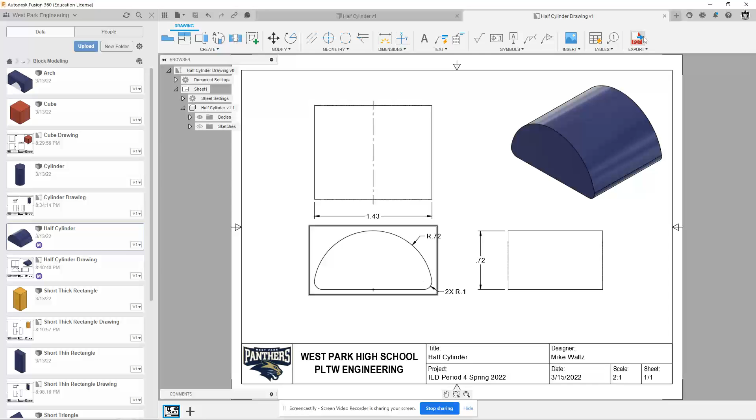All right, you guys, we're going to do our last drawing here, which is the arch. Find that and open it.

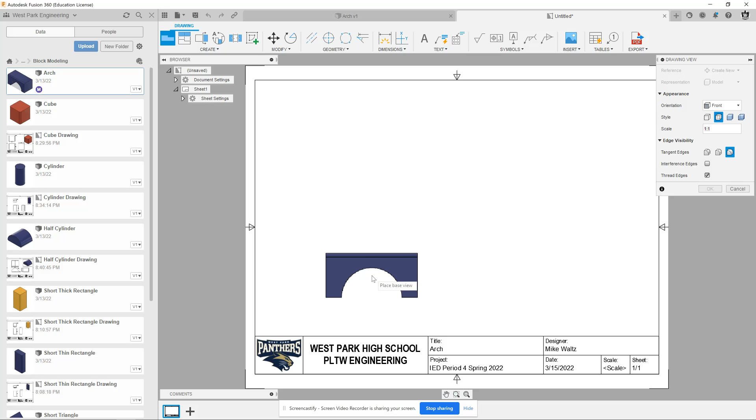Change workspace, drawing from design, WPHSA, hit OK. You can see it's really small, so change the scale. Let's go 2:1, twice as big. Looks good, still plenty of room.

Hit OK. For the projected view, click there, go up, go to the side, go diagonal, check mark, escape, double click on the isometric, choose shaded, then close.

We're going to do our center lines first. Center mark on the circle. Boom, there it is. Notice it just makes a little plus sign there.

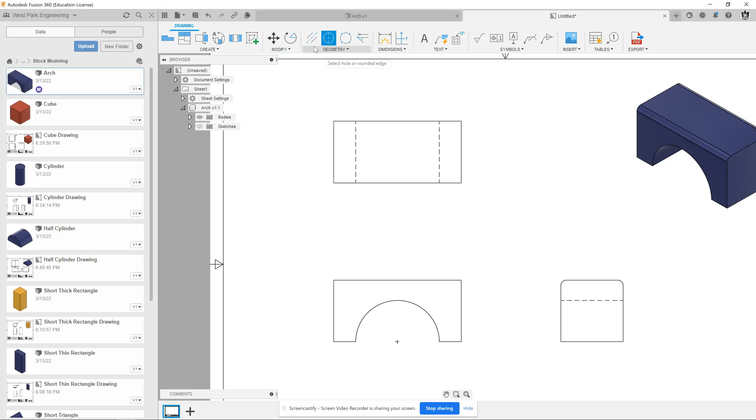We're going to do a center line up here from the hidden line to the other hidden line, showing the axis of this. Over here, we could put a center line on this bottom edge, but it would look really awkward and it's tricky to draw, so we're going to leave that alone. That's enough for center lines.

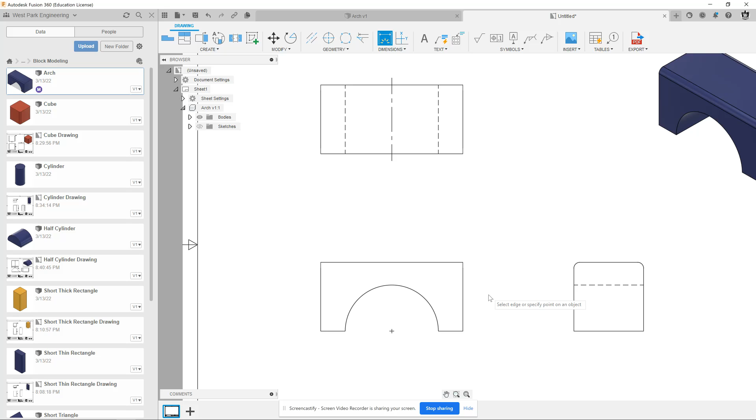Now we can start dimensioning. What I would do first is dimension the box. That's like the main thing going on. So we'll do the height. Oops, that didn't quite work.

If it ever does this to you, hit escape, D for dimension. We're going to use the corners here. So I click one corner, then the other, and I can put that in. There's my height. I'll do the width up here.

I'm going to go corner to corner. Then I'll do depth over here. You should be able to click the left and right sides. There we go, and we got that. Okay, cool, so now we got the box shape done.

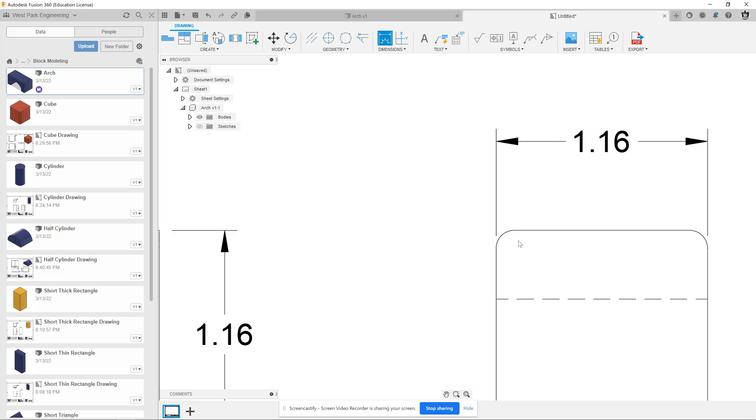Now it does have two rounded corners in here, so what I'm going to do is find a spot here. When you place this dimension, we don't really want the arrowhead for the radius to go through the other dimension, so I'm going to kind of slope it down a little bit. You can see I'm right below it.

That's a little neater. Hit escape, double click your R. There's two of these fillets, so I'm going to put two capital X space in front of it and then hit enter. That's looking pretty good.

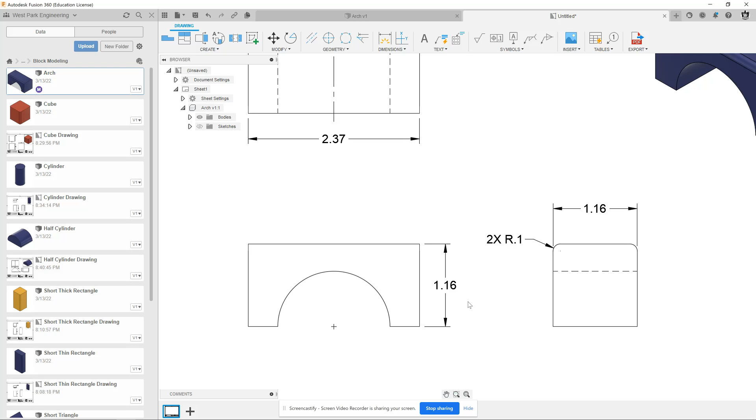The only other thing I need to dimension here is this circle in the bottom. When you do something like a circle, basically cutting something out of this piece, the easiest way is to think about the size and location of the thing. So the size of this half circle is just the diameter or radius.

I'm going to hit D for dimension. I could click on that and it'll put a radius dimension, and I'm going to move it. You could move it down here or leave it up inside. I'm going to move it down here. I think that looks pretty good.

Then the other thing we have to do is the location. When we measured this while actually drawing, we measured this little distance here. You could do that, it wouldn't be too bad, but the best way to locate any circular feature is to measure to the center. So we're going to use our dimension tool to do that.

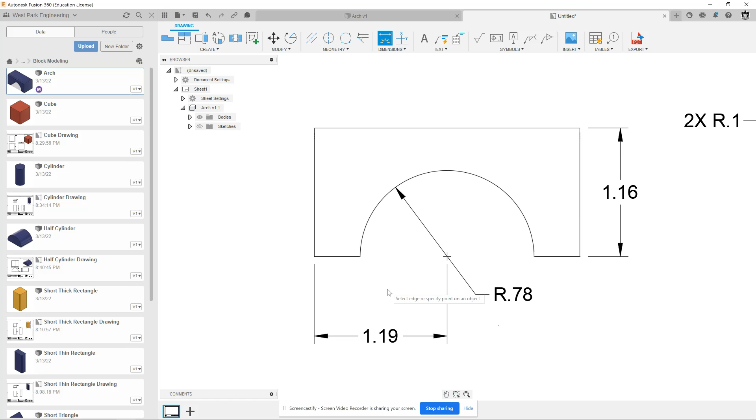You can just click the corner point here, boom, and then click the center point here. If you go down, it'll let you do a dimension, and that's a proper dimension of this thing. We showed the radius of the arc, and then we showed where the center point is located, which is 1.19 from the edge.

Okay, so everything on this drawing looks good. We dimensioned everything we needed. We got the box, we got the fillets, we got the half circle cutout. Hit save. Save that bad boy, and we're done with that.